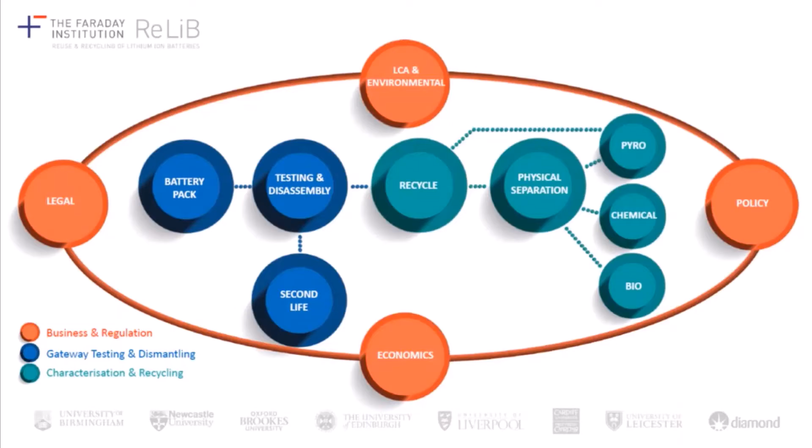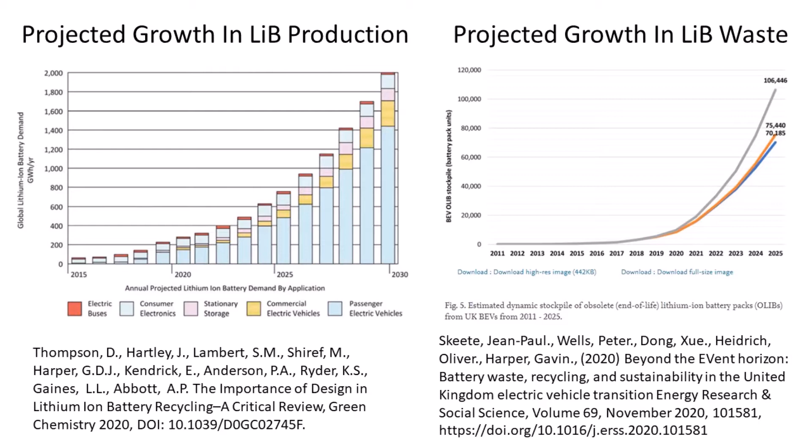There are any number of projections and predictions about the growth of lithium-ion battery production in the years to come. What's a little bit more challenging is forecasting when those batteries will reach the end of their life, given the potential for them to be used in second life applications after they've enjoyed a first life in electric vehicles.

We often talk about the waste management hierarchy, with prevention coming at the top, so if we can avoid creating waste in the first place, and then following that, reuse, recycling, recovery of energy, and then finally disposal, as a hierarchy of options in terms of waste disposal.

Within recycling, what I want to cover in this presentation is that there are a range of processes, from present battery recycling, which is focused around shredding and comminution of cells to passivate them, and often techniques like pyrometallurgy and hydrometallurgy to recover the materials.

What we want to move towards is more advanced battery recycling processes with less manual labour input, more automation and artificial intelligence. That means the complexity of the process is going to increase, but the benefit is that we might be able to extract purer material streams which are of higher value and retain more of the energy that's been input into producing those material streams in the first place.

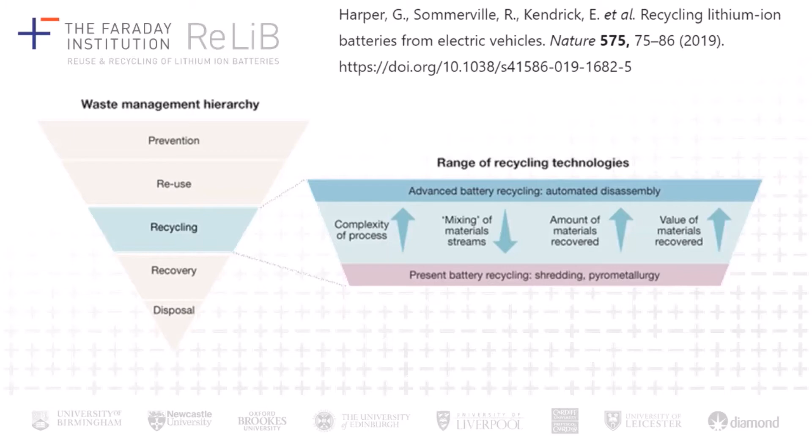Our hope is that we can increase the amount of materials recovered and the value of the materials recovered. Lithium-ion batteries are quite a complicated structure compared to, say, lead-acid batteries, which are very simple and enjoy high recycling rates at the moment and high recovery rates of materials.

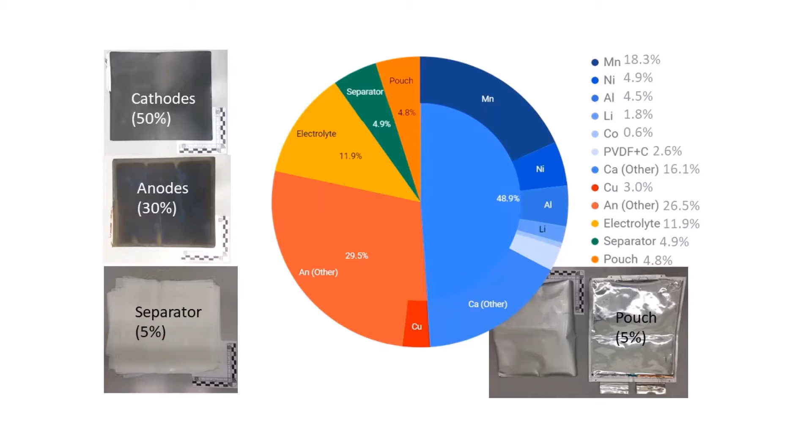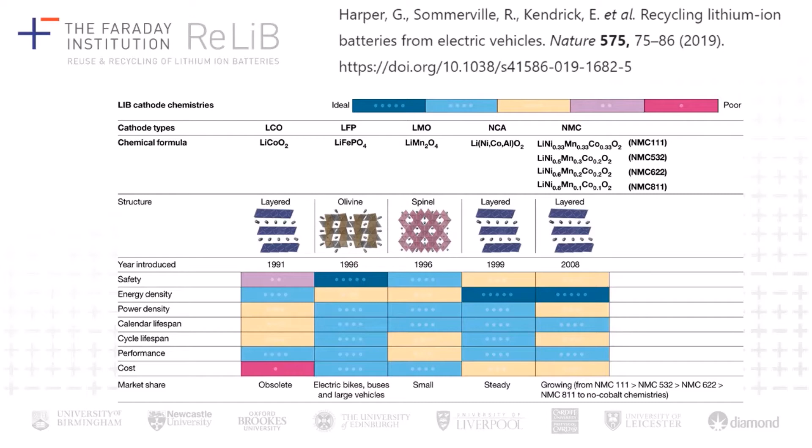There's a lot more complexity to lithium-ion batteries in terms of their structure, which makes them difficult to recycle. And there's also a great deal of variation in the chemistries employed by different manufacturers, and also the packaging designs of electric vehicle batteries.

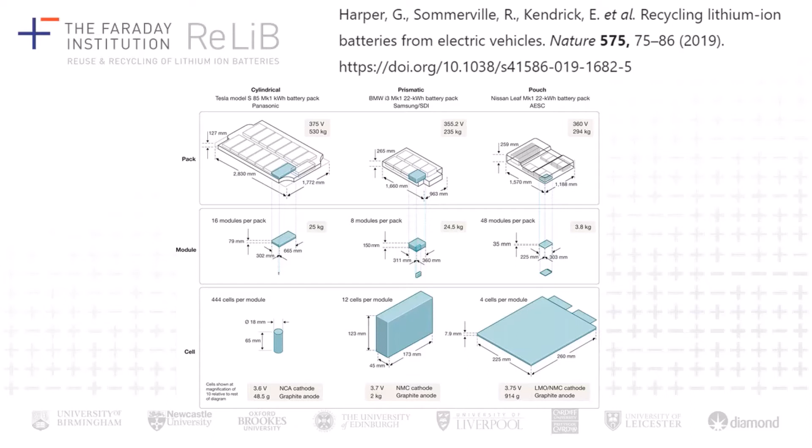So there are different types of cells. There are pouch cells, which are sort of flat plastic laminated together with the layers of material inside. Prismatic cells, which have a rigid outer case containing the battery, and cylindrical cells, which we're quite familiar with in portable electronics, and the sort of cells employed by Tesla and some other manufacturers.

What we envisage is a circular economy for electric vehicle batteries, where perhaps midway through the life of the electric vehicle you might extend its life with a reconditioned battery pack, and then at the end of life we deal with batteries intelligently, trying to extract the most value out of them. So considering whether the pack can be remanufactured into a new electric vehicle pack, have a second use in an application like stationary power storage, or if we need to recycle the pack and recover the material.

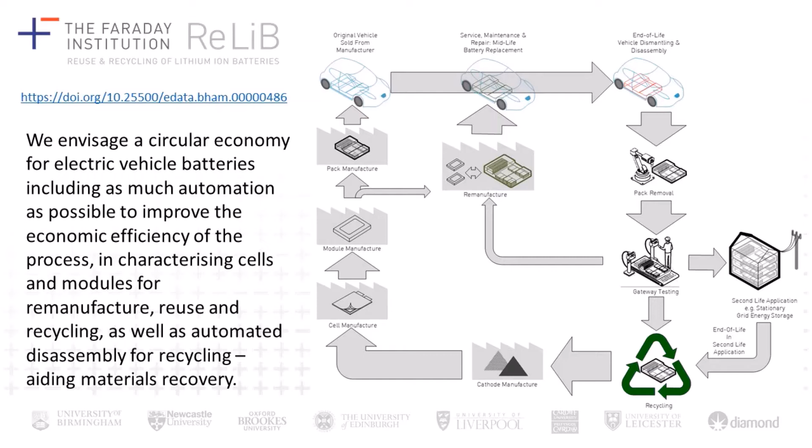And if we are going to recycle it, we want to do it as intelligently as possible, using processes that seek to recover as much of the material and value as we can.

If we want to optimise the materials we recover and be able to separate battery packs and diagnose which batteries are suitable for reuse, remanufacture and recycle, we need to be able to break the packs apart and disassemble them. At the moment this is being done manually, but as I've said earlier, we want to move to more automation as part of that process.

And there are different challenges at different scales of the problem. In terms of actually removing the pack from the vehicle in the first place, it's obviously something that is very physically heavy, so there's manual handling considerations around the weight of that pack. There are high voltages present, but also there's variation as a result of the vehicle service life. Different vehicles, different shapes and sizes, but also we don't know what's happened during that vehicle's lifetime.

It may have been involved in a crash which has warped the chassis, so the bolts are in slightly different places, or jammed or misaligned. There's a lot of variety in the different fixings. A mechanic may have tried to fix something over the years and ended up rounding off the bolts, or they might be rusted or corroded. So there's a lot of variety to deal with, which is less of a challenge for a human, but if you want to automate that process, you're going to need some really smart robotics.

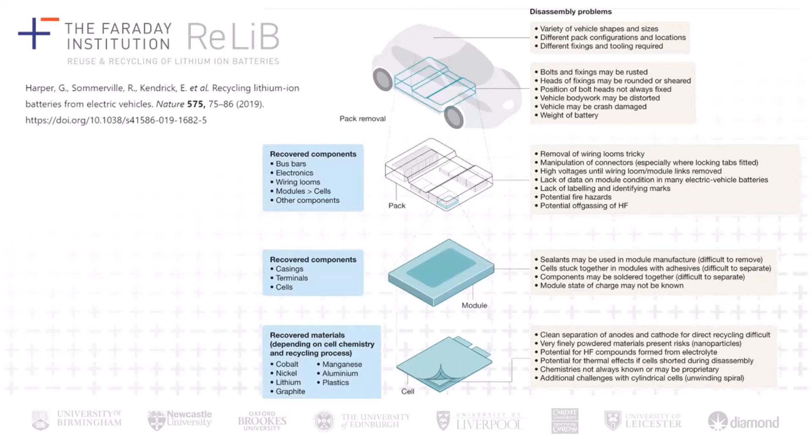There's a whole series of challenges around data—we don't know what condition the pack is in, what's happened during its service life, what sort of chemistry is in the batteries that pack contains. So there's a real opportunity for design for recycling, including data, maybe having a digital passport that accompanies the battery pack containing information, and it could be dynamically updated with information from the vehicle during use from the battery management system.

At the point of disassembling the pack, there are also lots of hazards around the potential for off-gassing, fire and thermal events, and also thinking about the actual process of disassembly. For example, if you're using a metal tool and you drop that and that creates a short circuit, there's obviously problems there in terms of a thermal event.

It's easy to explain that to a person, but as far as robotics are concerned, how do you develop robust mechanisms and algorithms to ensure that as things are manipulated, metal tools can't become dislodged and drop into that pack?

We've got a paper currently in press, submitted to the journal Resources, Conservation and Recycling. That paper is looking at whether to shred or not to shred as a preliminary cell breaking step before subsequent processes—it's a techno-economic evaluation of a range of different hydrometallurgical process routes for treating lithium-ion battery waste.

It compares what happens if we used mixed black mass as a feedstock versus what happens if we've disassembled the cell prior to hydrometallurgical processing. Obviously, if we can disassemble the cell first, then the streams of waste going into that process are much more refined, they're not mixed, and they're easier to separate.

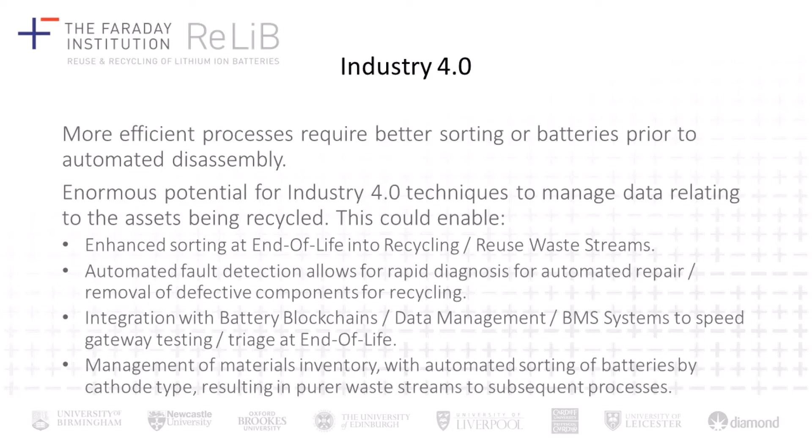And then also being able to manage the asset data around, for example, the cathode formulations, so that when batteries enter that disassembly process, batteries of a similar type can be sorted together automatically, resulting in a purer output stream of material for subsequent hydrometallurgical or direct recycling processes.

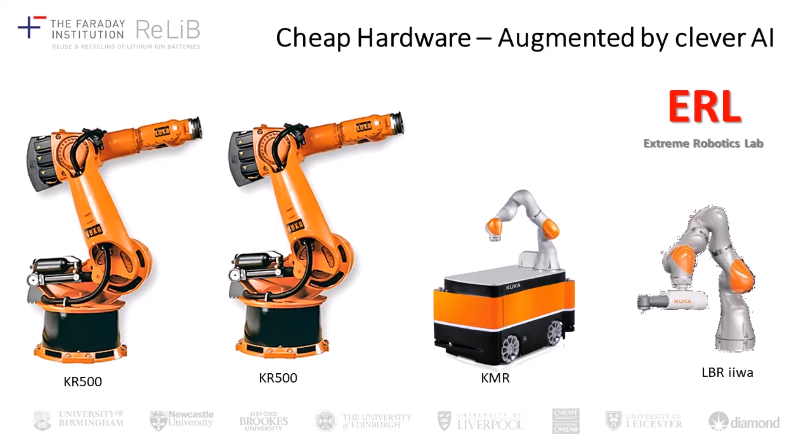Within the ReLiB project, the robotics theme is led by Professor Rustam Stolkin, head of the Extreme Robotics Lab, assisted by Dr. Alireza Rastegarpanah, a Faraday Institution Research Fellow. One of the main themes they're looking at is how to use cheap, off-the-shelf industrial robotics hardware and augment it with clever artificial intelligence to really add value.

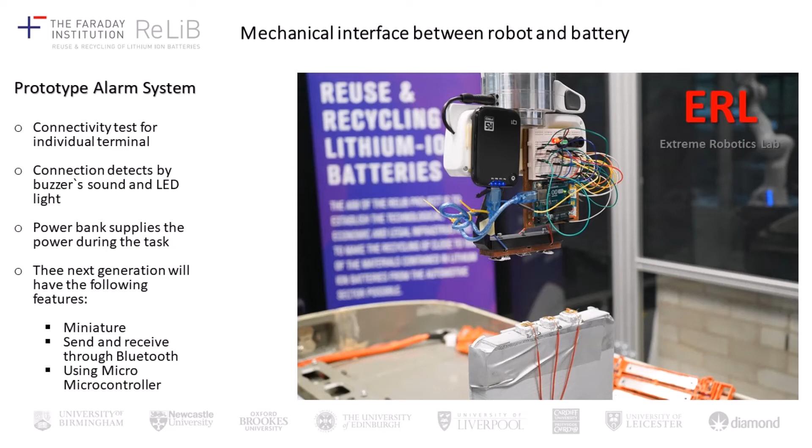They're breaking down the range of tasks you might encounter when processing end-of-life vehicle batteries and developing solutions for different parts of the problem. For example, how can you get a robot to make contact with the battery to enable EIS testing to ascertain the state of health of the battery?

Other challenges they're tackling include vision-guided manipulation, so we can imagine situations with cobots—robots working in collaboration with human operatives—and how they can assess a situation using vision systems to ascertain the position of objects and operatives that may be collaborating with the robot.

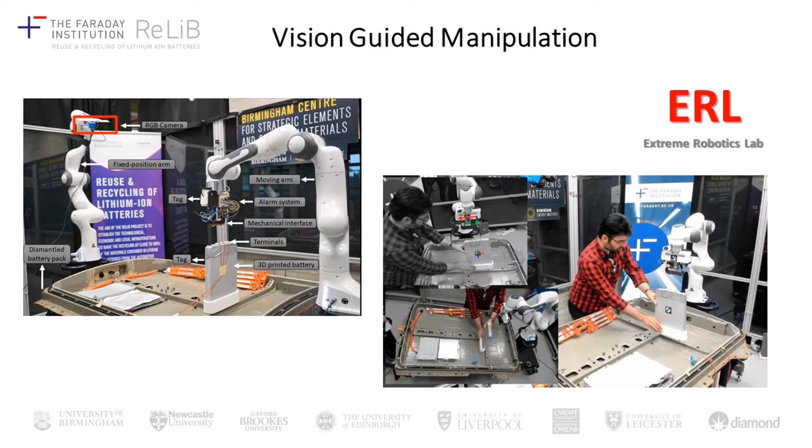Which takes me very neatly onto our next slide, the University of Birmingham's plan for scale-up and demonstration. The University of Birmingham has made a big investment in Tyseley Energy Park, which will be a centre for demonstration for a range of different energy technologies near the centre of Birmingham, with a whole host of technologies deployed on that site.

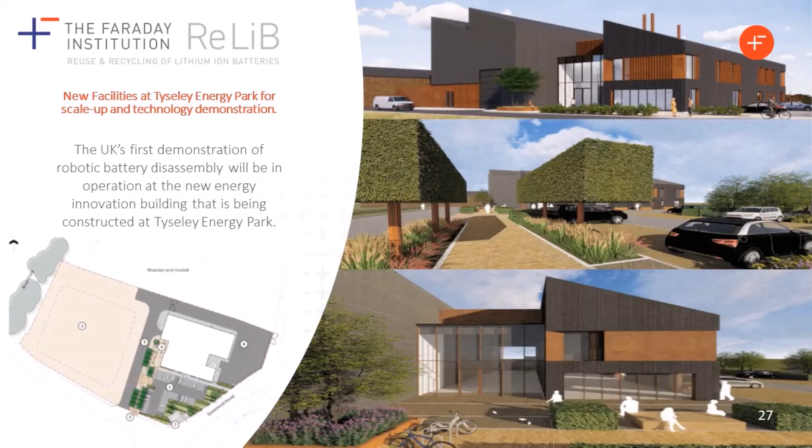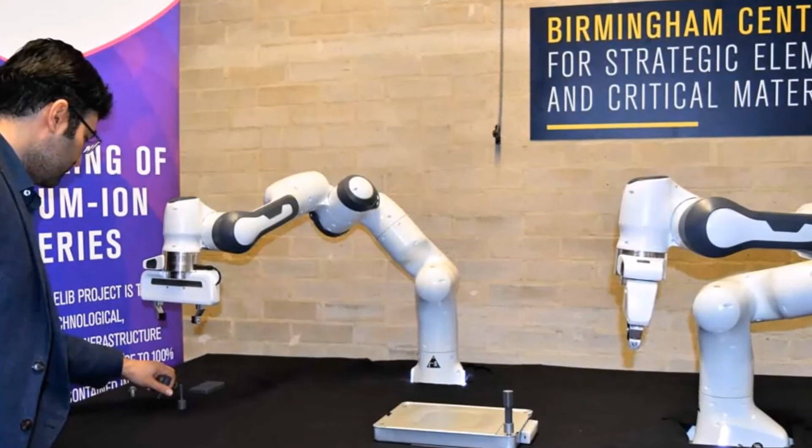One of the things that's interesting from a battery recycling perspective is the Birmingham Energy Innovation Centre, which will be a hub for some of our work around critical materials amongst other research. Within that building, we're going to develop an integrated approach to electric vehicle recycling, leveraging a lot of our work around robotics and automation to look at both how to recycle electric vehicle batteries and remove those from vehicles.

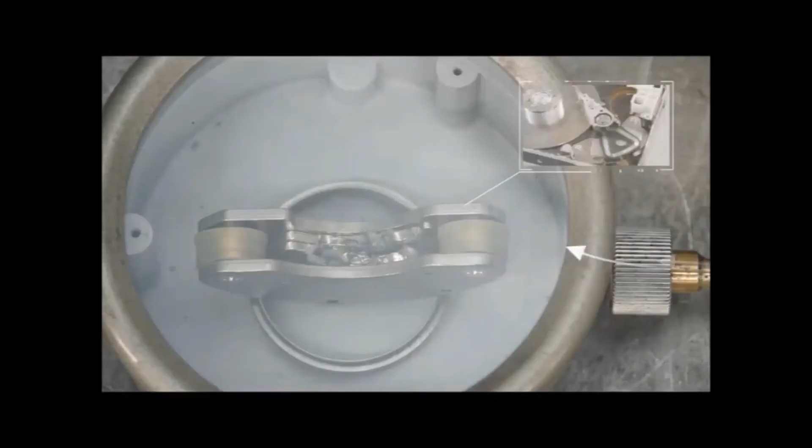But also there's another stream of work at the University of Birmingham looking at how to take electric vehicle motors and recycle the neodymium rare earth magnet from them using a novel process developed and patented by the university. So there are some similarities between recycling electric vehicle motors and electric vehicle batteries.

If you think about the challenges at different scales of disassembly—removing the motor from the vehicle, then taking the motor to bits, then extracting the magnetic material—there's actually lots of commonality there. This includes manual handling tasks for removing the motor, and challenges around the diversity of different designs, the weight of the motor, and its physical bulk.

Then as you start to take things apart, there's dismantling cable looms, and when it comes to the actual motor itself, the use of glues and adhesives to hold magnets in place. There's similarities there with some of the challenges with glues and adhesives in electric vehicle batteries, and of course the opportunity for design for recycling.

As I mentioned earlier, there's this proprietary process developed by the University of Birmingham that is able to decrepitate neodymium rare earth magnets, making the magnetic material easy to recover and turn into new electric vehicle motors. Our aim is really to take an integrated process to the dismantling of cars.

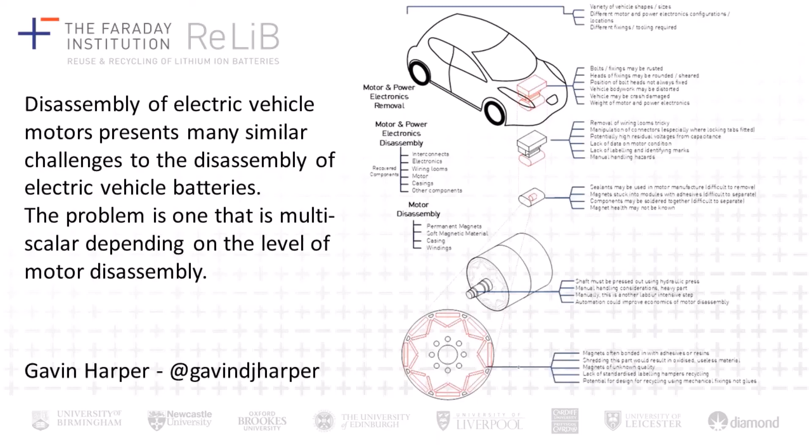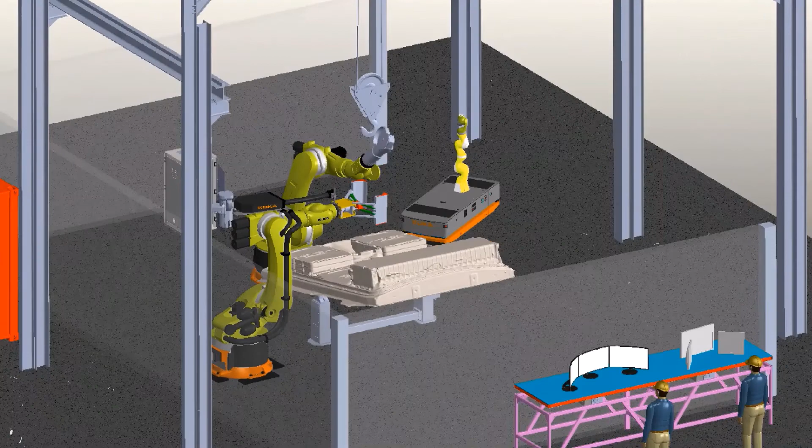If you look in this next short video, you can see our approach. Rather than the sort of production line approach where you've got a sequence of robots, one after the other, performing an action, we believe there's such a diversity of vehicles to deal with that you may be better off tackling that at one station with flexible robotics able to change their tooling and adapt to different vehicle configurations and geometries.

A theme that's come up a couple of times in this presentation, and something I think the industry really needs to give consideration to, is how we might design lithium-ion battery packs better to enable recycling—design for recycling. I think some of this could be around standardisation, so the less variety we have to deal with when recycling battery packs, the easier we can recycle them.

Some of it is also about conscious design decisions, making things easy to take apart, perhaps reducing the variation in the types of fixtures and fastenings used. Also thinking about the elimination of glues and adhesives, and how we can maybe have mechanical fixings rather than sticking things together. I think some of the same challenges for designing lithium-ion batteries for recycling could also apply to electric vehicle motors around standardisation and removal of adhesives.

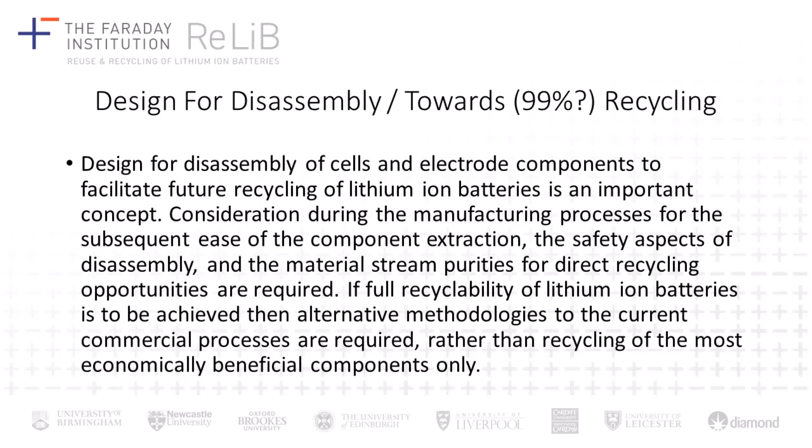I think also there's an opportunity in terms of communication of data between the product and the recycler to be able to identify components which will optimise the way in which we're able to recycle them.

It's an exciting time at the University of Birmingham as, despite all the challenges presented by the pandemic, work has continued apace on the construction of the Birmingham Energy Innovation Centre, where we're going to trial some of these novel recycling approaches.